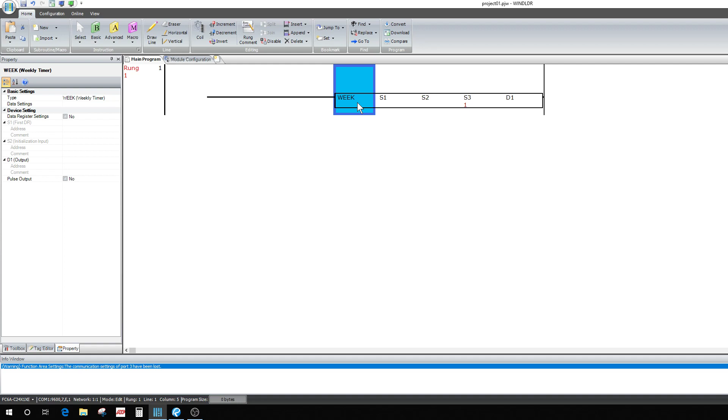All right, for the week timer that I'm going to show you, you have to have an FC6A. It will not work in FC5A. You're going to go to Advanced, go to Week Programmer, go to Week. This is going to be just quick to show you how to use this. You open that up. You're going to go in here and you can set different parameters. It's going to give you a preview of your offs and ons down here, how it works.

All right, your output. This is the output on the PLC that it's actually going to turn on. We'll go ahead and set that. You've got to go to output, not input. So get you an output. I already got one that says security lights there. Okay, then you're going to go to P1. Parameter 1. This is when do you want it to come on?

What days? I want my security lights to come on Sunday, Monday, Tuesday, Wednesday, Thursday, Friday, Saturday. I want them to come on at about, let's say, 8 o'clock at night. Maybe we'll make it 5 o'clock at night. We'll make them come on at 5. I want them to go off Sunday, Monday, Tuesday, Saturday. I want them to go off about 6 in the morning. That's when it starts getting daylight here in Texas.

Now you can see down here, on, off. I had it backwards. That's on, this is off. That's on, this is off. And this is daily. You can click right here, and that is by the day, Sunday, and you can pick which day you want to look at if you're changing them around. So it's on till 6 in the morning. It goes off. Then it comes back on, turns back off.

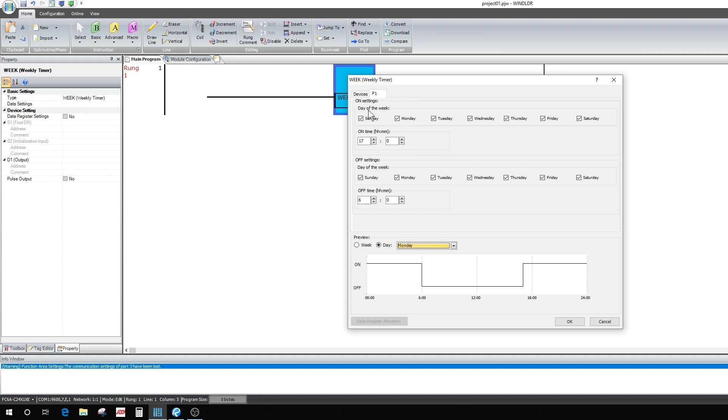And you can go over here, back to devices if you want. If you want to add more instances to change stuff around, all you've got to do is change this right here, and it adds tabs. So if you wanted it to come on at a different time on Monday, like maybe you're programming the lights in a store, you only want them Monday through Friday, not Saturday, Sunday. But Saturday, Sunday, you want them coming on at a different time to make it look like somebody's around. Well, you can change all the different times.

You can set up, I don't remember for sure, I think 10 different parameter pages. But you can make these lights come on at different times each day if you want by programming the days individually. We'll say okay on that.

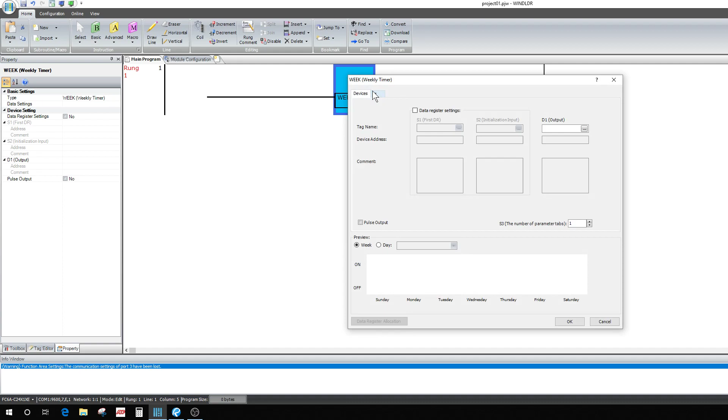Well, that's because I used that one. I shouldn't have used it. Let's go back. Let's try to do this again. Q0 security lights. All right, we're gonna go to P1. I'm gonna go. Let's do that. Those. Okay.

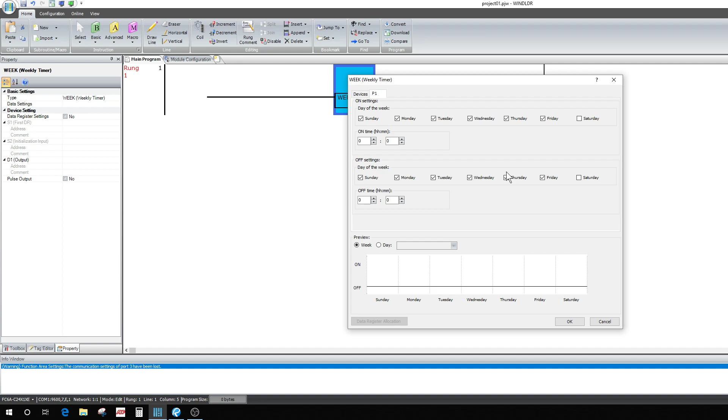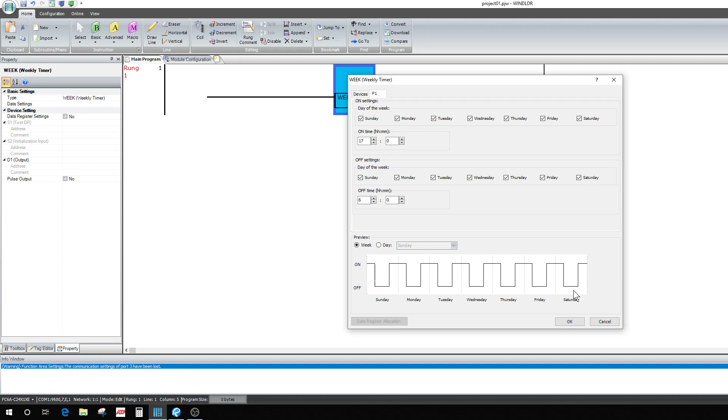On time, we're going to say 5 o'clock. Off time. This is a 24-hour format, by the way. That's why it says 17. Just subtract 12 and you got what you want. That's 5 o'clock p.m. You can do the minutes also. Okay. There's the days. There's the weeks. On and off. See, I left Saturday out. If I put Saturday on there, it's going to drop Saturday in. Okay. Just click OK.

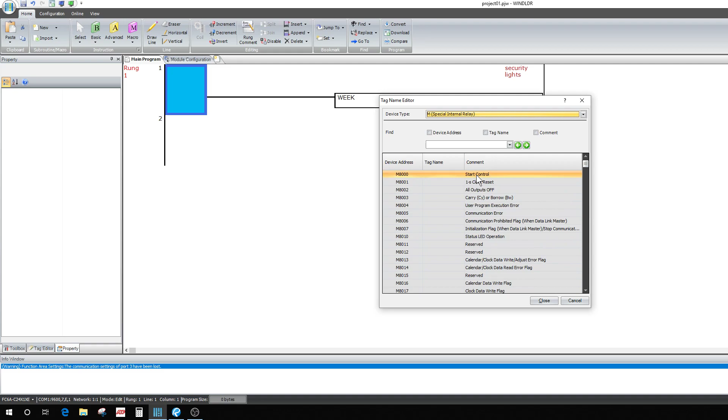All right, and right here you want to do, let's see, I think it's 8120. No, it ain't 8121. What is it? There's another trick here. We'll go into special data registers, special internal relay. Okay, I want to go to initialization, initialize bit. Let's see. Did I pass it up? Must be start control. Anyways, okay.

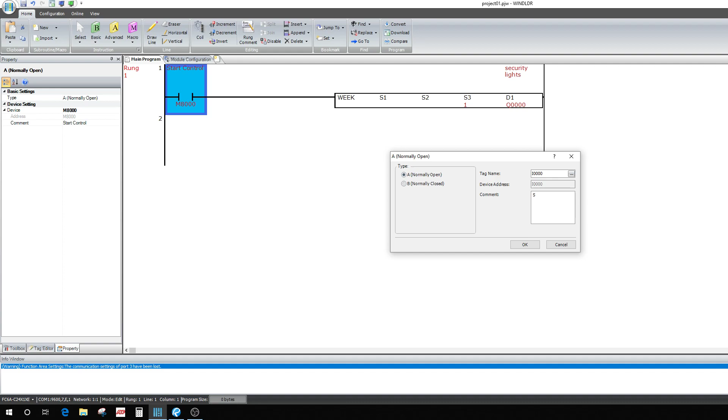So this way, when the PLC comes on, you could put this as a switch. You could change that to an input. So when you have input I0 on, say out of town, then it makes this work. As long as this switch is on, this week programmer works. So on those days when the time hits the certain time, Q0 turns off. Or you can do that initialization bit. I think it's at 8000. Not real sure on that. I have to check. That just means as soon as you turn the PLC on, it starts doing this time.

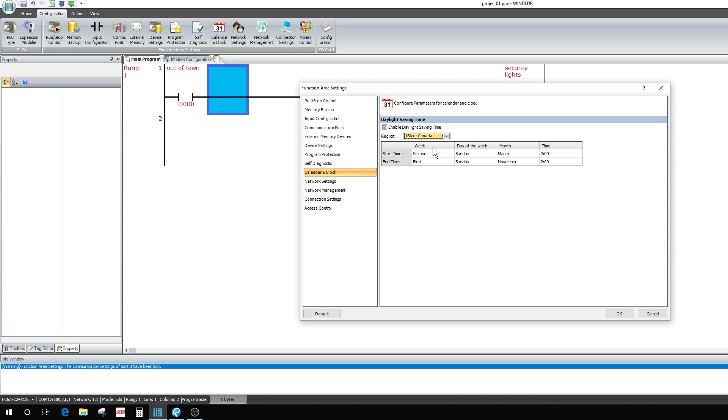Another thing you want to do is you need to go to configuration too, calendar and clock. All right, you're going to want to go here because this is going to be setting it custom like that. Wherever you're at, daylight savings time, you want to set it, US or Canada. Okay, you click OK. That way, this clock works the way it's supposed to with your time zone.

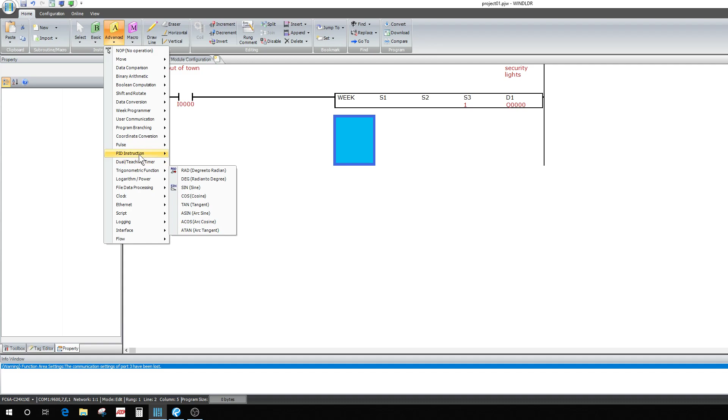See, you can also go, let's go down here and put another one. I'll show you. You can also do this daily. Advanced, let's see. Programmer. Do a yearly timer. All right, now the yearly timer is pretty much the same thing. I'm sure you can feel your way through this, but it actually has calendar days if you want. Say you're out of town and you want it to look like on Mondays through Friday, or Monday, Wednesday, Friday, or something. Something else is going on.

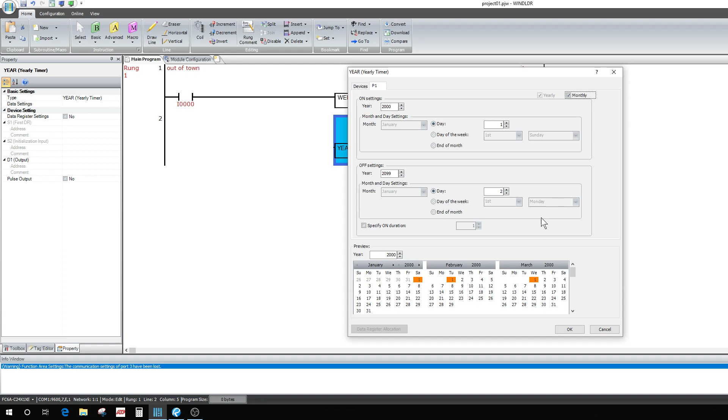You can make lights come on different days, and you can also incorporate it with this and make them come on different days at different nights or at different times. Anyways, it kind of works the same way. You have the output, then you have the day that it comes on, the year, when you off and on pretty much per day. Anyways, I'm sure you can figure all that out, and you can switch it to monthly and to yearly. Anyways, that's the end of that. I know that's short. I'm not going to save any of the changes to that.

But I would really say it'd be a good idea to look into that IDEC class if you're really interested in PLCs, because if you start programming, anytime you need anything, all you got to do is call IDEC customer support, and they're more than willing to help you. They actually seem like they actually want to help you. They're not like some of the other customer services.